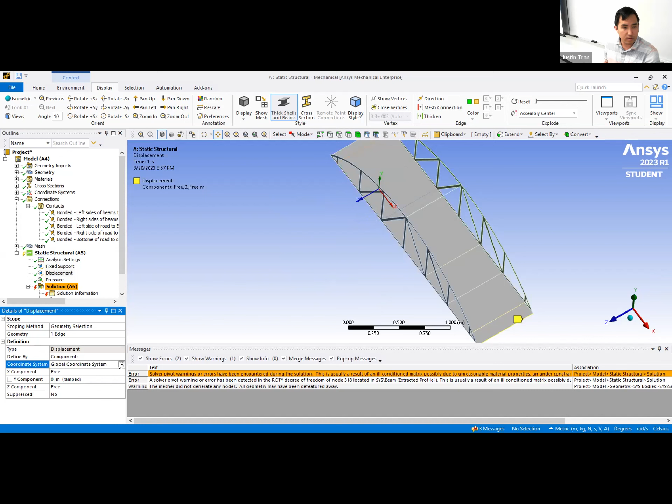Everything looks to be in order. None of those have actually done anything. The solution is, as you can see... yeah.

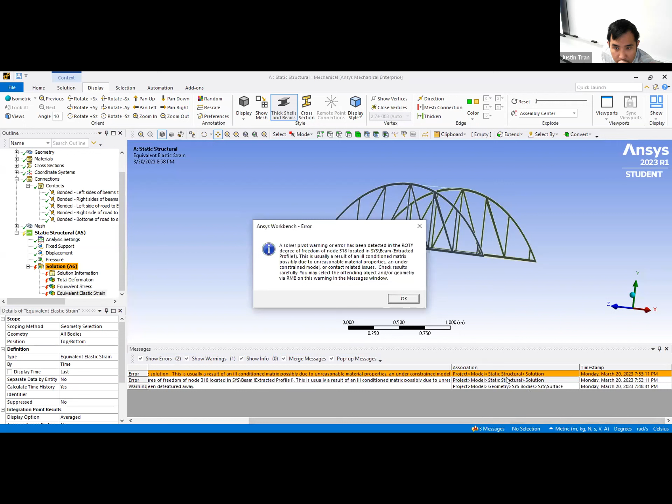Let me try this really quick. If that's what fixes it, I'm gonna scream. I'm gonna try a fixed support on the other side too. Let's see. Okay.

I shouldn't have deleted that one. I should have just left it there. Yeah, it's fine. Because that constraint acted as a fixed support, sorta. Right, it's supposed to anyway.

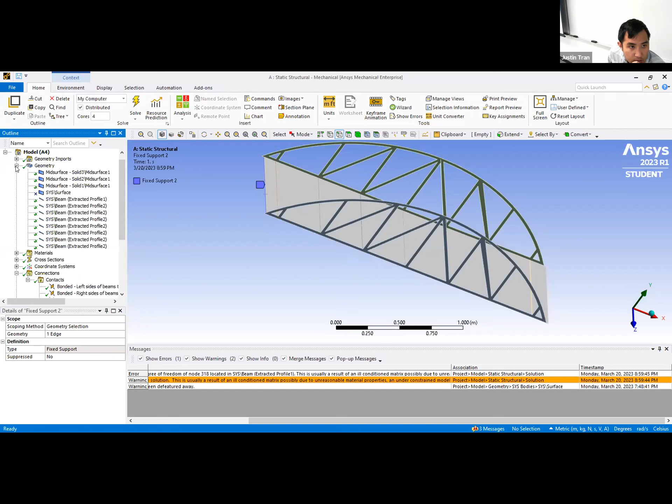Just beam extracted profiles. Top, yeah, so it's the top beam that's... Okay, let me give it one more try because it's 7 o'clock here. I'm not sure, let's try it. Let me try suppressing it really quick.

Should that beam have that problem? It shouldn't be. What were we saying, Una? The first search on the ANSYS forum says there's a gap somewhere in the model. Okay, it could. So it could be that. Do something else. Yeah, looks like that beam right there is the problematic part.

And so I would probably go back to SpaceClaim and see if there's a gap there or if that's properly connected at that point. But it looked like that's properly connected. I mean, the connection here is good, but I would go back and check in SpaceClaim that it's actually...

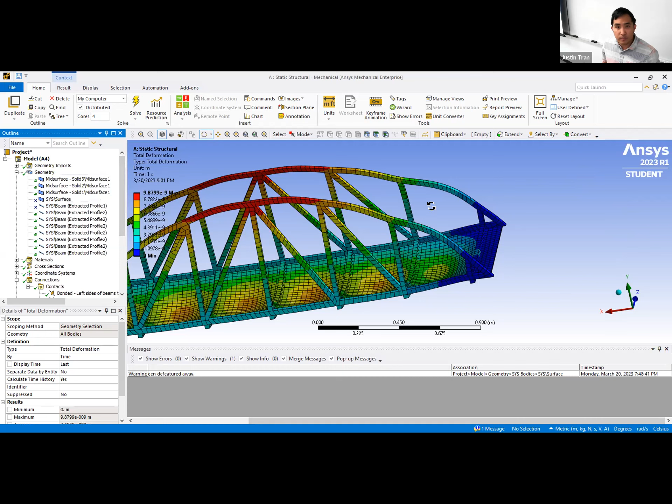For some reason that one seems to be giving the issue. So yeah, but everything else looks okay from here. Yeah, okay, okay, all right. I need to, it's past 7, so I need to start the lecture. Okay, okay, okay.

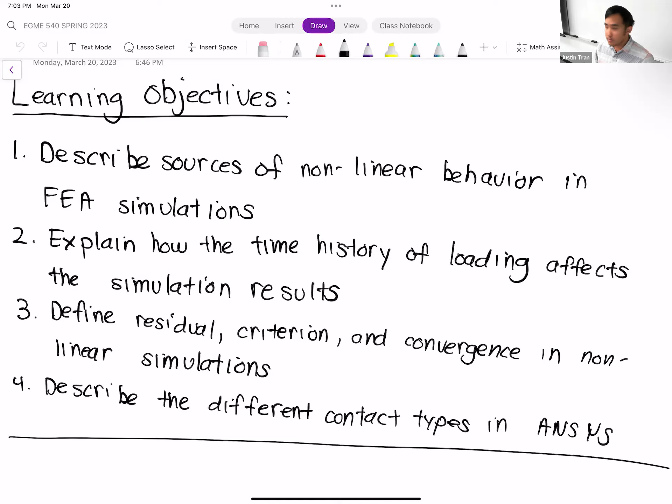Okay, so let's talk about non-linearities in FEA. And so up to this point, and this includes activity 5 that we didn't do this week, up until this point we've basically been making the assumption that our simulations are linear. And you can think about linearity in a few different ways. On the one hand, the first thing that probably jumps out in your mind is we are using a linearly elastic material model. But linearity actually extends beyond that.

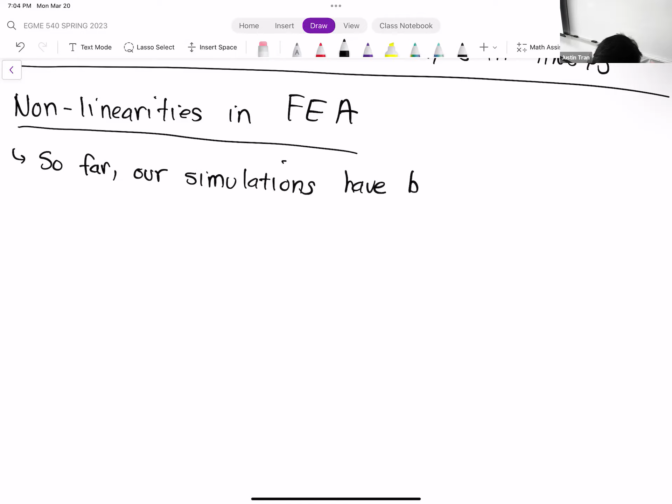We'll talk about what that means and what it means to actually lift linearity. And so like I mentioned, linearity has to do with a lot more than just the material model. It kind of has more, just in general, to do with this idea of proportionality.

When you can assume linearity, you really only have to run just one simulation. Ideally, part of the power of FEA is that you can run simulations under a multitude of different conditions, but when you have linearity, you really only need one. And as long as you're not changing the directions of the loads, not adding or subtracting loads, from that one simulation you can learn a wealth of information due to this proportionality.

Let me give a quick example to show what I mean. Let's say we have a cantilever beam, and when we expose it to a certain load, say 1,000 kilonewtons, the beam is going to deform, or displace, by 3 centimeters.

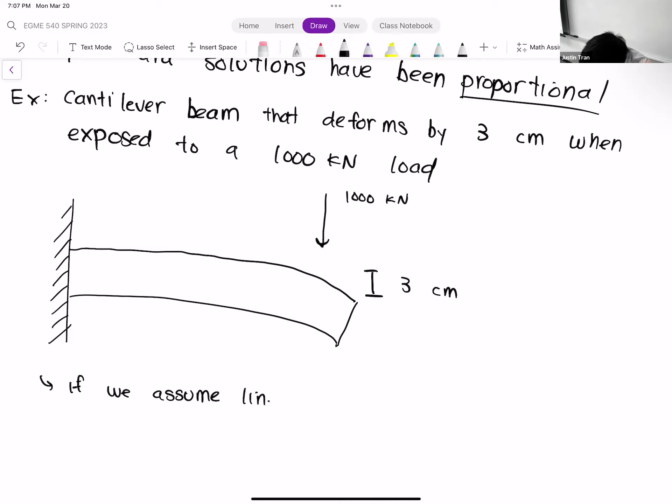So if we assume this situation is linear, if we assume linearity, I can tell you the result of the simulation if we cut the load in half.

So let's say instead of 1,000 kilonewtons, we apply a load of 500 kilonewtons. Because of this proportionality assumption, if we cut the load in half, that means our displacement, or our response, is also going to be cut in half. You don't even have to run the simulation — you can already tell right away.

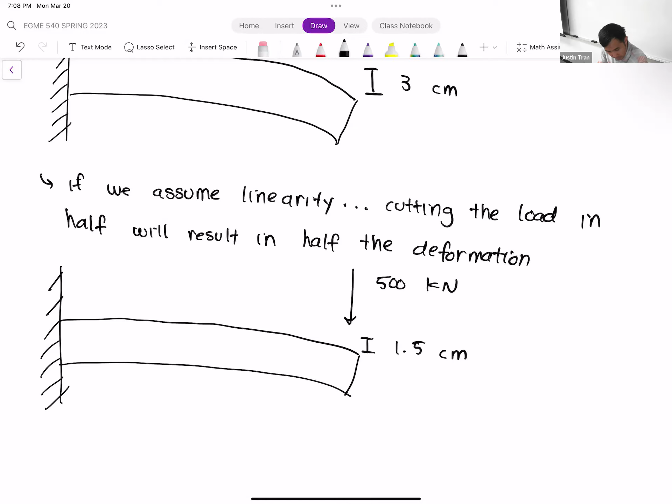So if we apply a load of 500 kilonewtons, this displacement here is only going to be 1.5 centimeters, just half of what it was before. This relationship largely has to do with the fact that we assume our material model is linearly elastic, but there are a lot of other things that are assumed linear in finite elements as well. So that's what I mean by linearity.

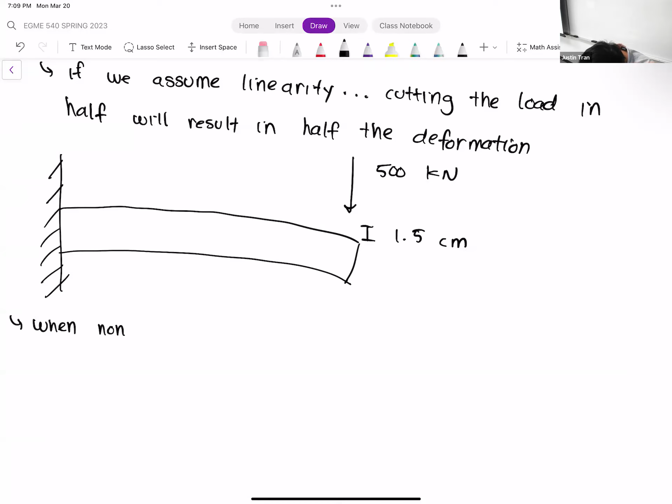Of course, what we're talking about this week is non-linearity. When we assume non-linear behavior, or when non-linearities are present, we don't have this directly proportional relationship. In reality, non-linearities are always there — the fact that our simulations are linear is very much an assumption. So when we say we're introducing non-linearities, what we're actually saying is that we're making our simulations more realistic.

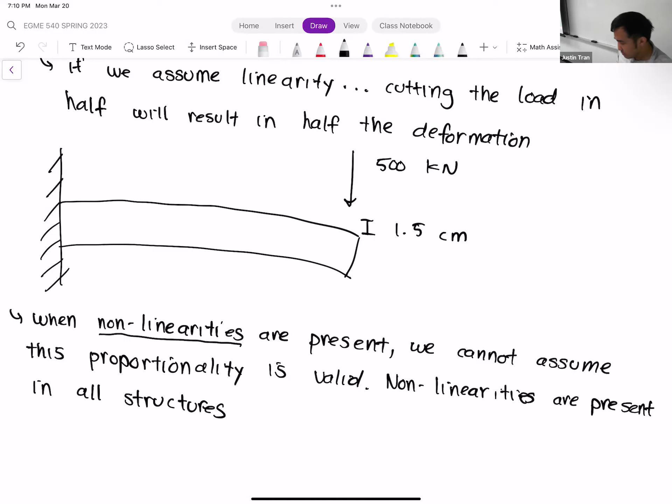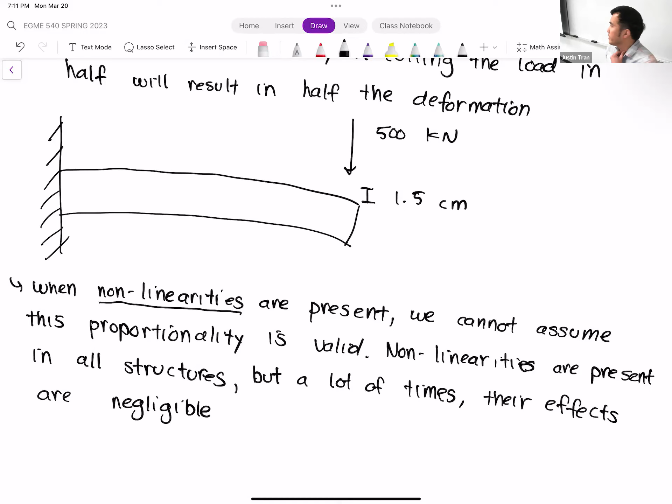But in a lot of cases, basically all the cases we've seen so far, these nonlinearities' effects have been fairly negligible. So we'll talk about some situations where you can ignore the non-linear effects. But in situations where they can't be ignored, we need to make sure our simulations can pick up on these as well. ANSYS has a lot of tools for picking up on these large sources of nonlinearity, and we're going to talk about three main sources of nonlinearity and how ANSYS deals with them.

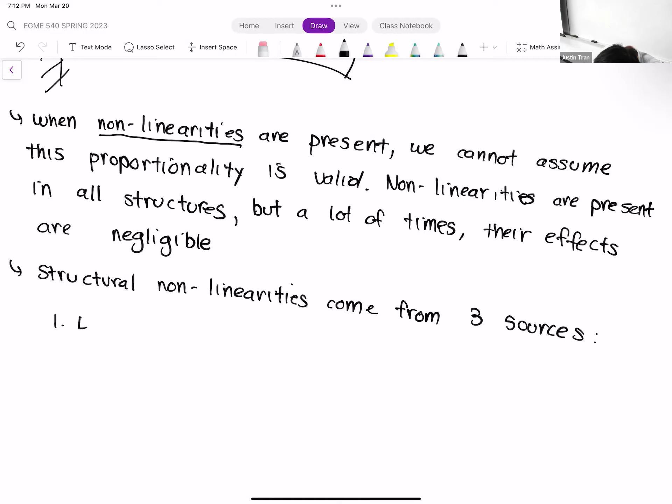There are more than these three sources, but these are the three main ones. The first one, and probably the most common, is large deformations — meaning anytime the deformations are so large that the structure distorts significantly from its original configuration. This causes some issues that we'll talk about soon.

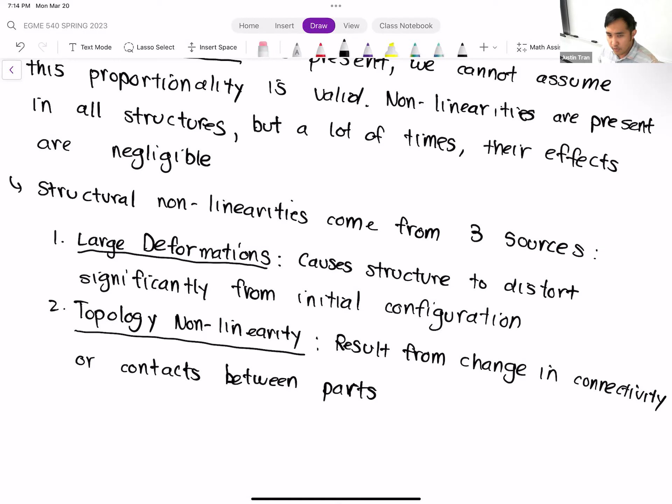The second source of nonlinearity has to do with topology — we call these topological nonlinearities. These result from a change in connectivity, and are directly a result of contact. The most common case is when you set the contacts to certain settings. For our last two activities we've seen the effects of contact, but so far we haven't explored that all too much — we've pretty much set all of our settings to be bonded. This week we'll talk about the different settings for the different contacts and see what effect that has on the results.

And number three, we have material nonlinearity. This goes back to our material model. If you remember from a few weeks ago when we talked about material properties, we talked about how there are different models out there, like hyperelasticity. When you introduce those, that introduces nonlinearity in the material properties.

Okay, so we're going to go through all three of these different causes, kind of what you can do about them and what features ANSYS has to simulate them. But before we jump into that, I want to preface this by saying, when you introduce nonlinearities into a problem, not just FEA, when you're talking about any kind of engineering or applied math problem in general, nonlinear things are always much more difficult to solve than linear.

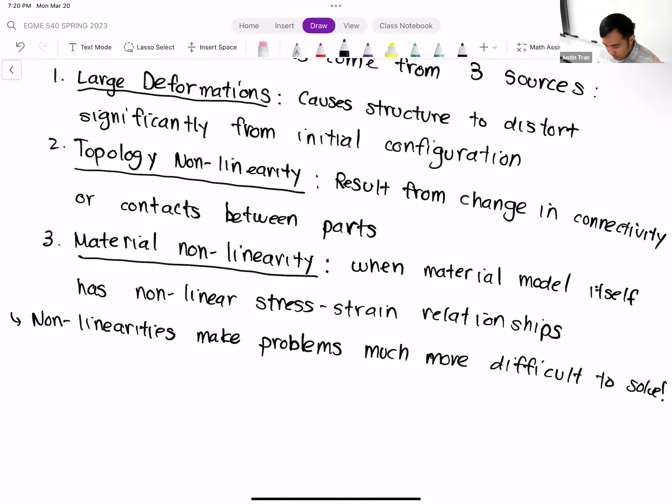Okay, all right, so let's expand on each of these three sources and talk about why they introduce nonlinearities. Let's start with large deformations. When you have large deformations, just like I mentioned above, your mesh and your geometry is going to be significantly distorted compared to where it started.

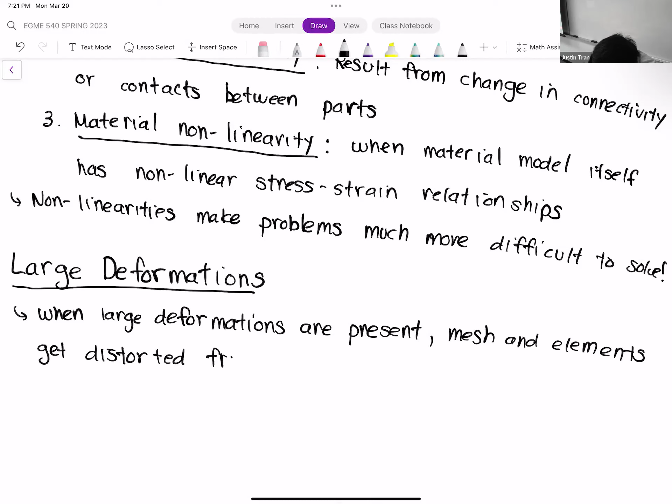It's actually something that's quite unique, and it's not something that I really appreciated until I actually started working here, because my background is mostly in fluid-based FEA. The thing about fluids FEA is that your mesh is always fixed, so you don't really move the mesh. For solids FEA, or structures FEA, the mesh actually changes and distorts along with the deformations that you solve.

Dr. Tran, I have a question. When you say fluids FEA, is that something completely different than computational fluid dynamics, or is that what you're implying? It's CFD, I consider it CFD, but there's different ways that you can run CFD. I think the most common way is to use finite volumes, but you can also do a finite element based CFD. Oh, I see, that was kind of my research. Sounds good.

When your mesh and elements get distorted—something we spent a lot of time talking about—that's usually what you want to avoid. When these element distortions get so bad, your solution can start to get bad too, because your elements become very skewed compared to before.

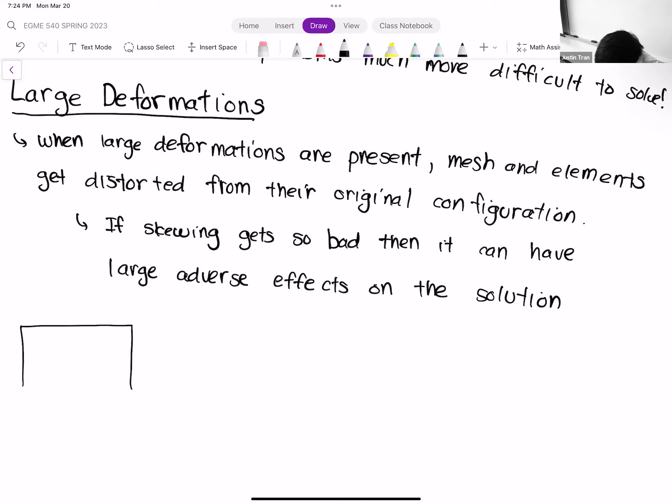You could have a situation where you work really hard to get a mesh with elements that look very nice. I'll do a 2D case since I'm drawing on a two-dimensional iPad. Maybe you work really hard and get elements that look like this—straight parallel edges, 90-degree angles, very high quality element.

But let's say you apply a load onto this element, or onto the structure overall, such that the element starts to distort. Maybe you apply a load and it starts to look like this, and if you apply enough, the element distorts even further and ends up looking like this.

That's obviously very bad. After you apply your load, if you want to compute something like stress on this element, you're going to have a hard time—you'll get a lot of those adverse effects of a poor mesh that we talked about last week.

In some extreme cases, when the distortion is really bad, you may have to do what's called dynamic remeshing.

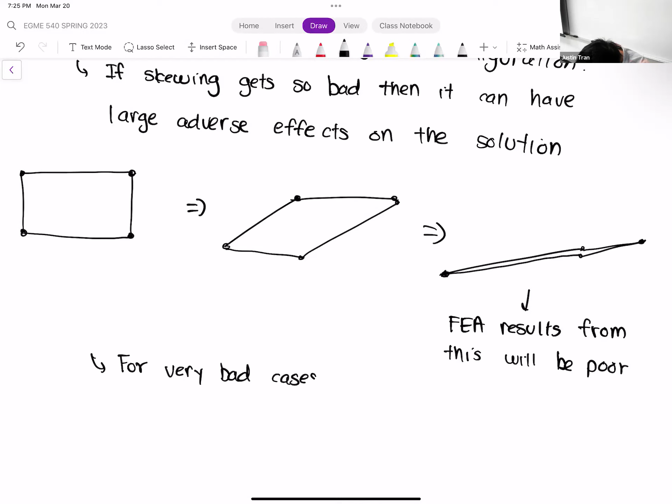Sometimes you'll have situations where you apply a load and your structure deforms so much that it might as well be a whole new geometry. In those situations, you may have to just make a new mesh when your deformations get that bad.

You typically want to avoid this because remeshing is a very expensive process, especially for the heavy duty meshes that are in the millions or tens of millions of elements.

But that is an option, and there are some problems out there where remeshing is your only recourse, so that's the only thing you have to do. The nice thing in ANSYS is that it's built in fairly well, so you can remesh—it's just not a good thing to do.

I had a student who just finished last semester. He was working on a problem for me where he was experimenting with the remesher a bit, but even for a very simple problem, the cost got so extreme that it just was not feasible. So yes, it's possible, but a lot of times you need a supercomputer for that.

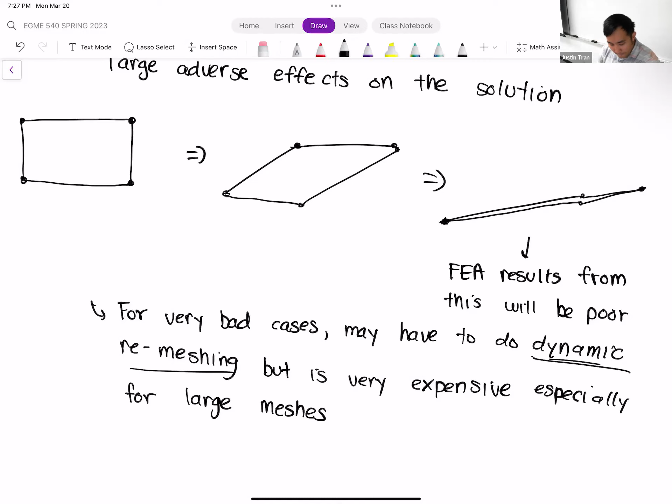One way you can deal with this, at least for static problems—which is the majority of what we're doing in this class—one way you can deal with this kind of geometric nonlinearity is to apply the load in steps.

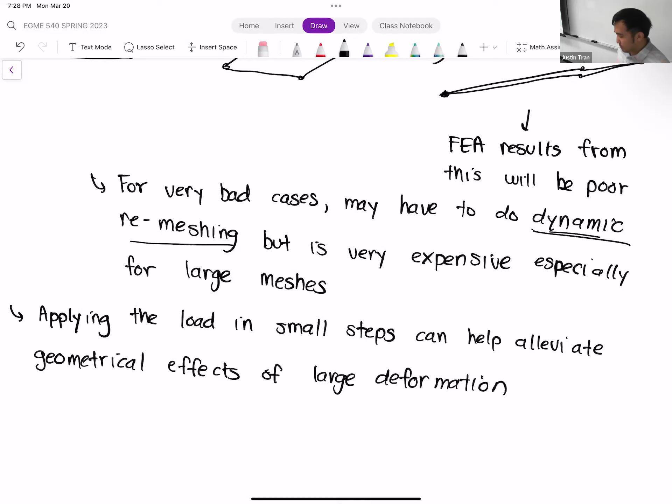The good news is that ANSYS actually does this automatically already. I'm not sure if some of you have noticed, but if you click on one of the loads you're applying in your ANSYS activities, in the bottom right of the screen you should see a ramp that kind of goes up. That's ANSYS's way of slowly ramping up the load until you reach the final configuration.

Oftentimes you're going to see something like this, where on the horizontal axis we have time, and on the vertical axis we have load. You'll see ANSYS do something like this, where it kind of ramps up.

ANSYS does this automatically for a few different reasons—it's not just for large deformations. It helps a lot with stability, making sure your simulation finishes in the most stable way possible, but it also helps with this kind of large deformation as well.

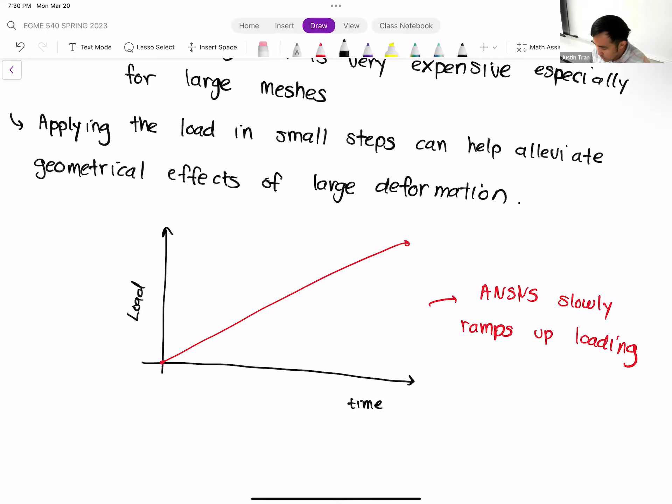Because when you start to have nonlinearities, what you start to see is that this relationship between load and response—or load and deformation, or load and stress—does not really follow this linear model.

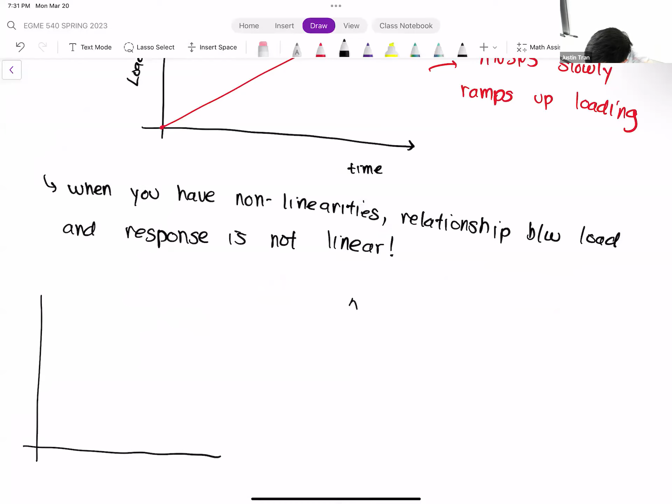So for a linear case, you might have something like this. On the left here, I'm going to have time and load, and right here, I'm going to have time and deformation. For the load, we're going to ramp that up linearly, so it's going to look like this.

What ANSYS is going to do is actually apply the load in small increasing increments. We start with a load of 0, and ANSYS knows this is your final load, the one you're actually applying inside ANSYS. What ANSYS does is then ramp up slowly to that: maybe 10% of the load, then 25%, 50%, 75%, 90%, and 100%.

Each one is actually a successive simulation. So each time the load is increased, ANSYS is running a simulation in the background to compute what the deformation would be.

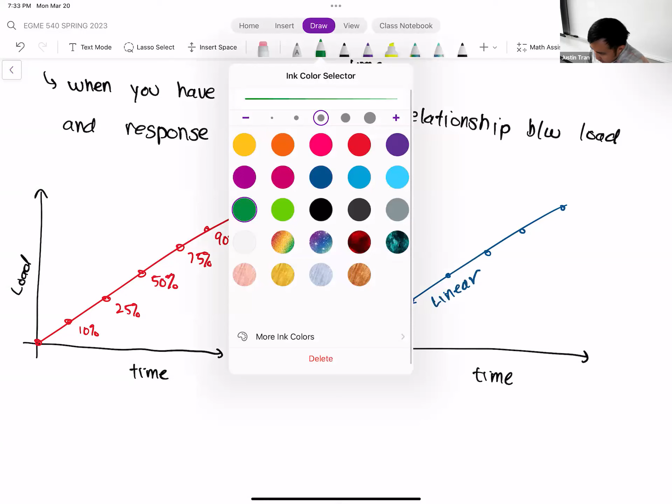If you had a purely linear simulation, you would have a graph that looks like this. As you ramp up the load, the deformation or response is also going to ramp up linearly. But for a nonlinear simulation, you're going to see a behavior more like this. For the smaller values of load, it mimics the linear case, but as you get to higher values of load, you actually see it deviate from that curve.

Typically what you'll see is that when you introduce nonlinearities into the problem, the computed deformations that you get actually increase.

So Dr. Tran, is it safe to say that in a linear FEA analysis, the loads are linearly related to the deformation? The relationship is linear, is that what you're trying to apply here? Yep, exactly.

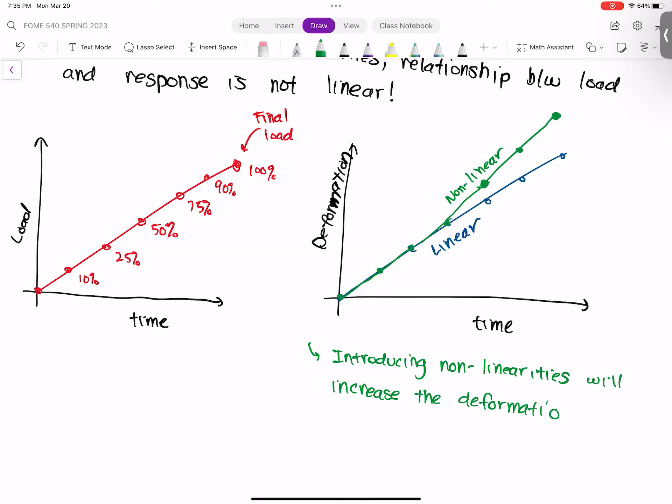What about the stresses? Are the stresses linear to the load? Yes, typically they are, because of that proportionality thing we talked about at the beginning of class today. I'm using deformation as an example here because that's usually the most apparent one you can observe, but this relationship also works for stresses.

Another thing I'm comprehending from those graphs is that for nonlinear analysis, the deformation increases with time, but in a nonlinear way, is that right? I'm using time here because we're applying the load gradually over time.

With each time step, each dot that we have here, we're increasing the amount of load. It's not necessary that nonlinearity makes deformation change with time; it's more the relationship between the load and the deformation. I'm using time as an axis here just to show how the load ramps up and how that changes the response.

I see. Thank you, sir. Yep.

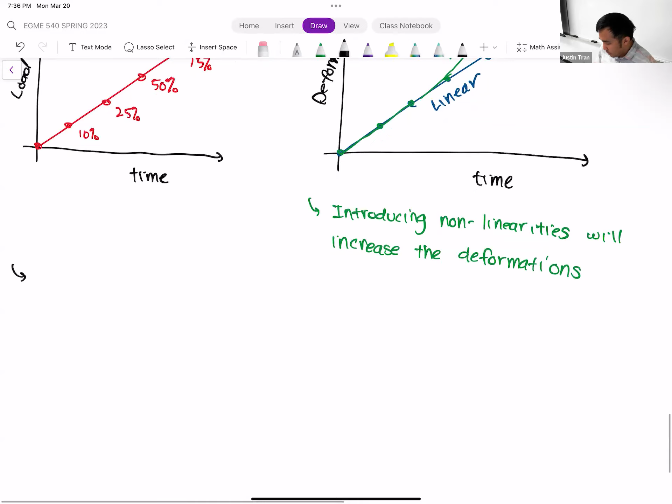The reason for this is interesting. If you recall from our discussion of advanced meshing, as your elements tend to get more and more distorted, it tends to stiffen up your system.

Of course, this effect is most pronounced when you have a linear element. So when you have linear tetrahedra or linear hexahedra, you see that very pronounced — that's the shear locking effect we talked about before. But even for quadratic elements, it has this effect too, just not as pronounced.

So when you tell ANSYS that you want to run a nonlinear simulation, ANSYS becomes a lot more careful about how it ramps up the load to try to maintain as much mesh quality as it can.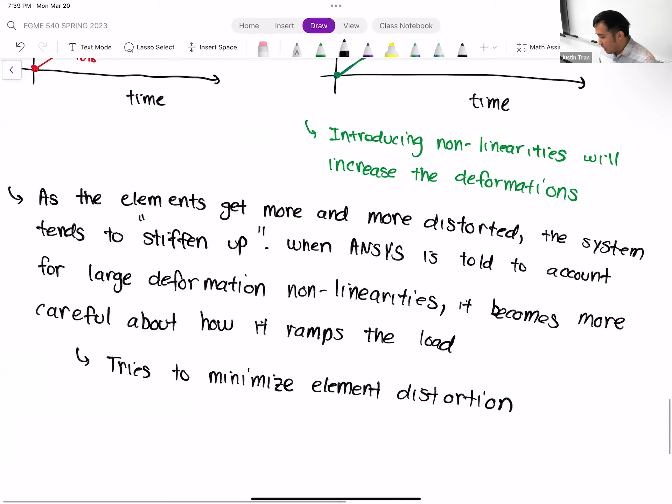I will say that, for a lot of our activities, unless you really kill it with a very large amount of load, you're probably not going to see a big difference between the results without large deformations and the results with large deformations. But that's basically what's happening under the hood. So when you turn on large deformations, ANSYS is really being very careful about how much the elements are distorting when you apply the load.

And you can modify this manually too. So if you want to modify how many steps or increments you want to ramp up the load, you can do that as well.

All right, any questions on this?

Okay, all right, let's take a quick detour before we move on to topology nonlinearity, and let's talk about nonlinear convergence.

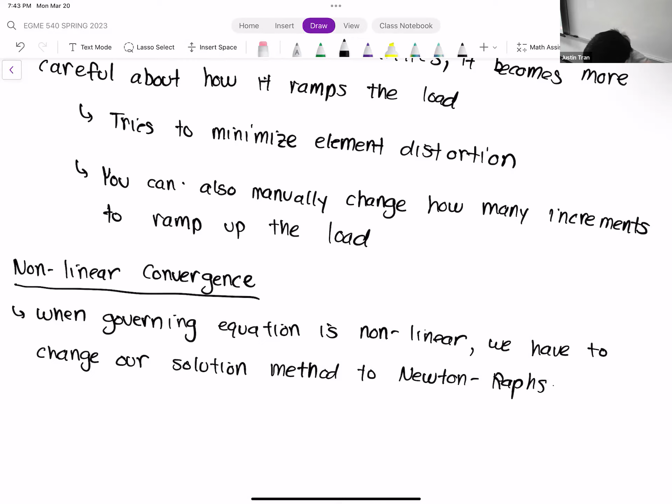Newton-Raphson is a very common method. It's used a lot in code because it works so well for nonlinear problems. We're not going to get into the details of that method—that's a totally different class—but I'll tell you what it aims to do. Basically, the way Newton-Raphson works, it works specifically for nonlinear equations. It linearizes them, approximating the nonlinear terms with linear terms.

Dr. Tran, I have a question. Please let me know when it's good to speak. Yeah, you're good.

One thing that popped up into my head when you wrote that Newton-Raphson vocabulary in your notes is explicit solutions and implicit solutions. Excuse the car alarm in the background. However, back to my point—is an explicit solution a linear solution and an implicit solution a nonlinear solution, or are those related somehow, or am I thinking about something completely different regarding explicit and implicit?

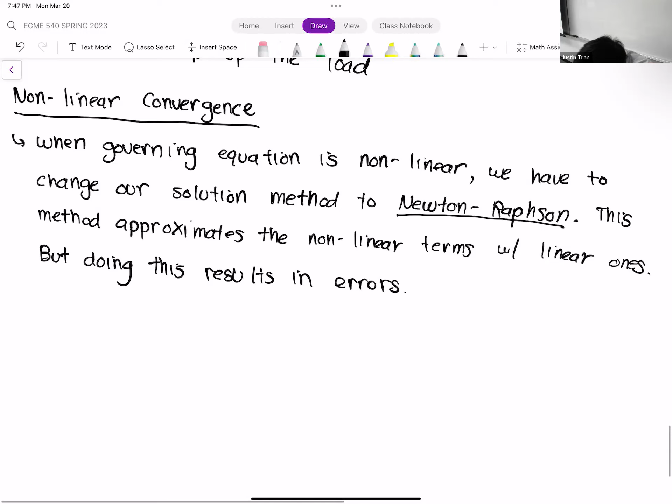And so the way that we compute these errors is that once you've approximated those nonlinear terms with linear ones, it becomes a lot easier to solve that equation. But if you then take your solution to that equation and plug it back into the nonlinear form of that equation, you're going to get some discrepancies—I should say, plugging it in.

These errors, we can quantify. Usually these errors are averaged across your entire mesh, and we give these errors a specific name called the residual.

Sometimes you'll hear the term residual show up when talking about computational methods in general. Usually the residual has to do with the Newton-Raphson method. You have a linearized solution to a nonlinear problem, and you want to see what the discrepancies are. Discrepancies are the residual.

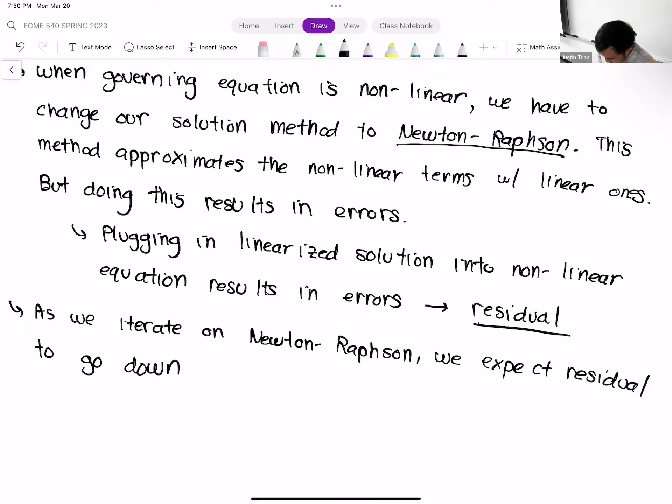So when we talk about nonlinear convergence, we're talking about the idea that we expect the residual to go down. Ideally, the residual should go down below a certain threshold so we can say our solution is accurate enough.

You can actually plot this. If you have nonlinearities turned on in your problem, whether from large deformations, topology, or material properties, you can view the nonlinear residual.

If you go to solution information in ANSYS, and then you go to, you can do one of two things: force convergence or displacement convergence.

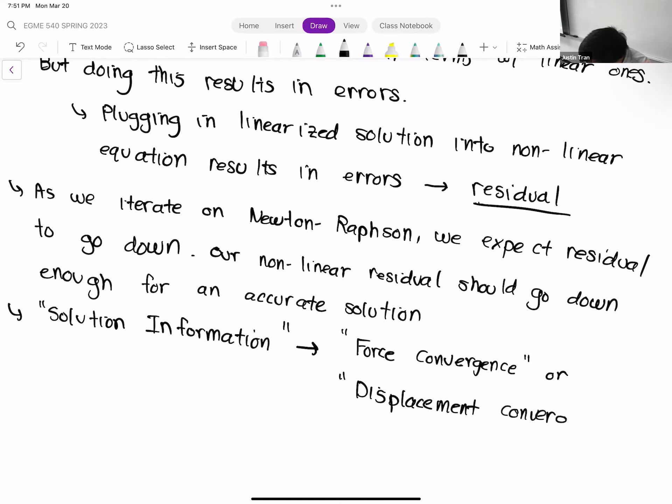Each data point is a different Newton-Raphson iteration. That's one good way to check, because one thing that can happen is that when you introduce nonlinearities, maybe you're introducing a little too many, and your solution may not be converged. So it's a good habit to check when introducing nonlinearities that you're still getting good nonlinear convergence.

So again, this is different than mesh convergence—mesh convergence is a different thing. But you want to make sure that whatever finite element solution you have is converged on all fronts. Every type of convergence, you want to make sure you're converged. That's kind of the idea for FEA. Any questions on this?

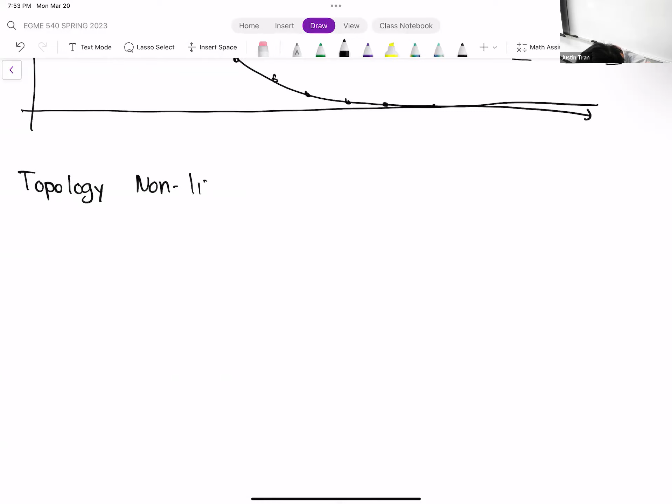Our question is, how would we check that it's converged again? Yeah, you would just follow this same process: go to solution information from ANSYS mechanical, and then check either the force convergence or the displacement convergence. You should see a plot that looks like this, something that goes down with time.

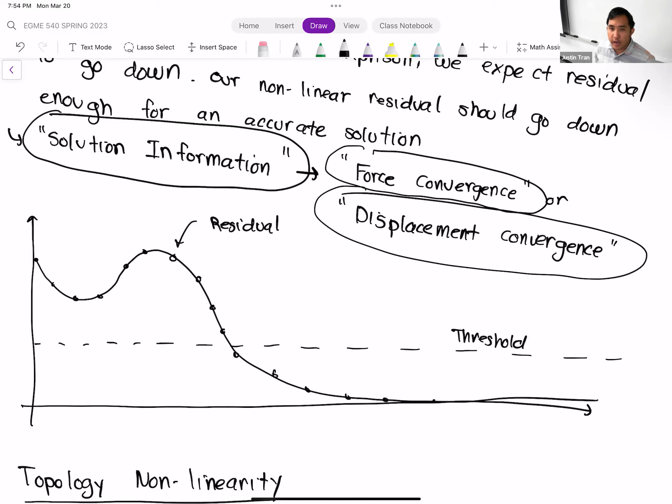Okay, so topology nonlinearity—this more has to do with the contacts between different parts in an assembly.

So far, we haven't really dealt with this, because whenever we have contacts between different parts, we usually assume that the parts are bonded together. When they're bonded, when you set a bonded support, you're basically assuming that even though you have different parts in an assembly, they're going to behave as one because they are bonded together. But if you loosen up this assumption and allow parts to slide or even separate, then you can introduce some nonlinearities into the simulation.

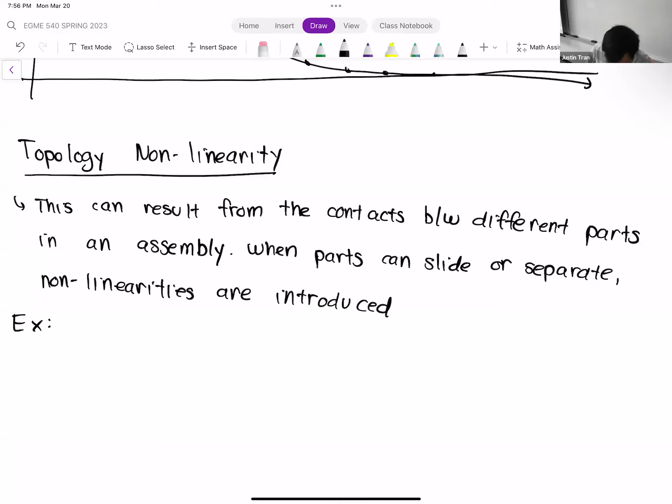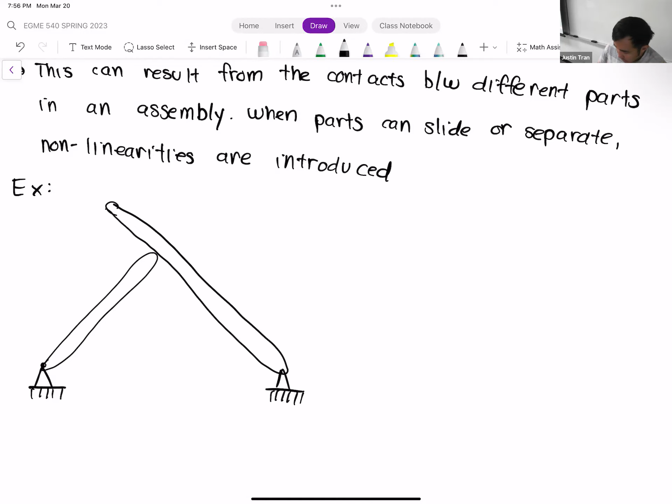All right, so I'll do a quick example. Let's say we have a two beam system. Maybe one beam is like this, and it's propping up another beam. And right in between these two, we have a contact.

So for the case when the contact is bonded, let's say these two parts are bonded together. When we apply a load here vertically up top, and that contact is bonded, then this whole structure kind of behaves as one.

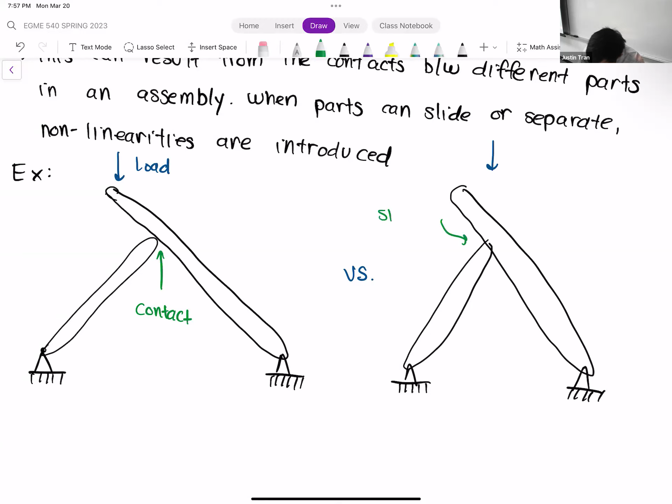Versus, let's say that we allow these parts to separate and to slide. So just like before, we're going to apply a load up here. What can happen is that if this contact slid, you can imagine: you're applying load up top, then this beam is going to rotate down this way if it's sliding and it loses that contact. If this beam slides down like this, it loses contact, and so the geometrical support or the structural stiffness of this entire assembly as a whole is going to change if that slides.

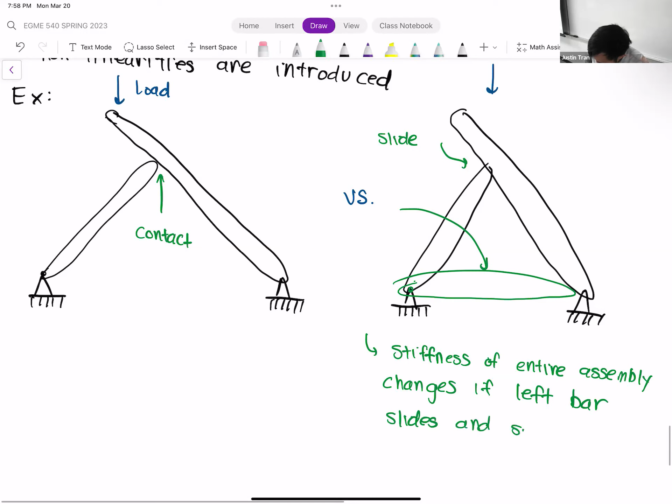And so maybe this only happens for certain values of the load. For a light amount of load, maybe the separation doesn't occur and this can still behave as one kind of part. But as you increase the load, maybe that increases the amount of tangential force that the left bar experiences, and then eventually it separates. So you get this nonlinear relationship of load versus deformation - at one point you might have an abrupt, big change in the amount of deformation that you see.

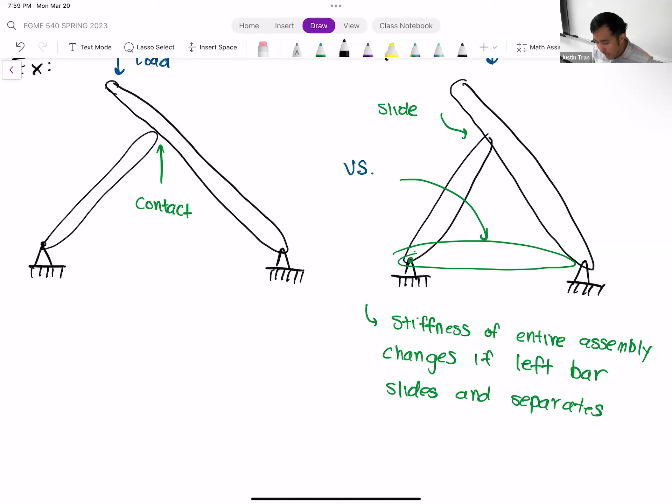Okay, and so with that said, let's talk about all the different contact options that you have within ANSYS and talk about whether they introduce nonlinearities or not. There are 5 that I want to go over. So the first one I want to go over is bonded.

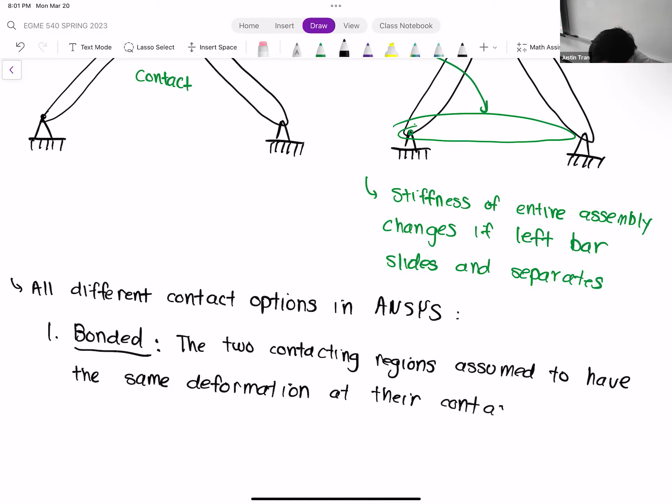This is the one that we have been using in activity 3 and activity 4. When you have a bonded support, that means the two parts, or the two contacting regions of the two parts, are completely bonded together. So their deformations are the same, or they're matched together at their contacts. They're coupled together in both the tangential and the normal directions - no sliding, no separation.

And so of course, with the bonded contact, the bonded support, this does not introduce any kind of nonlinearities. No nonlinearities.

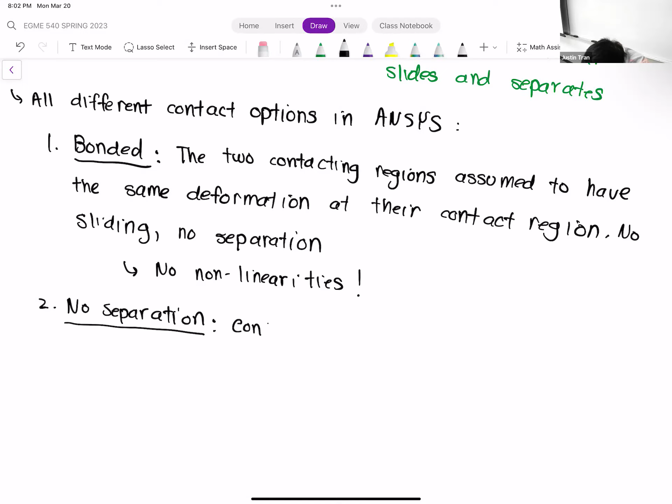All right, next we have no separation. Under no separation, the two contacting regions are coupled only in the normal direction, but they are allowed to slide past each other by a small amount. So it's not that much - there are still some constraints in how much they can slide, but they are able to slide.

Or at least that's the assumption - that the sliding is very minimal relative to the overall deformation of the entire structure. So effectively speaking, on a grander, more overall scale, there's no big amount of sliding. And because there's no big sliding and no separation, this also does not allow any nonlinearities.

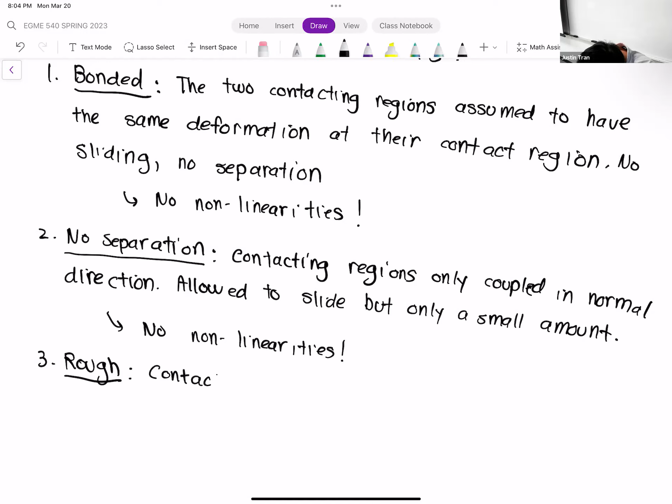All right, number 3 is rough. A rough surface is when the two surfaces, or the two contacting regions, are allowed to separate. But a rough surface means they can't actually slide - absolutely no sliding is allowed.

This is meant to represent the case when you have two things that both have very rough surfaces, and the coefficient of friction is so high that they physically can't slide past each other, at least not with a significant amount of force. But they are allowed to separate - you can almost imagine two saw-tooth surfaces that are going to interlock with each other.

And this is the first case where this does introduce some nonlinearities, because when surfaces are allowed to separate, and if separation does occur, that dramatically changes the overall stiffness or how the overall structure can handle any kind of response.

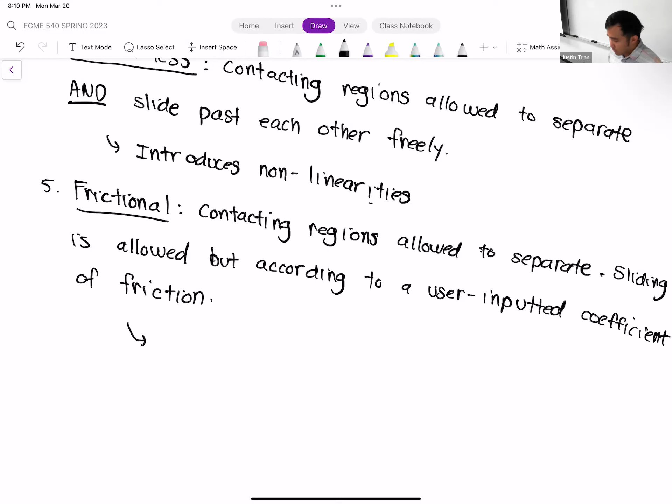And this, of course, introduces non-linearities.

So those are the 5 types of contacts that you can run in ANSYS, and that's the difference between them. For most of this class, with one exception being activity 5, we're going to mostly be using bonded supports just because that's the easiest to work with. But I did want to make you aware of the other ones, especially if you want to use different contacts for your final project, which we'll talk about after this.

Okay, any questions on topology nonlinearities here?

Okay, so one last thing I wanted to cover today before we close it out is how ANSYS deals with when two regions penetrate each other.

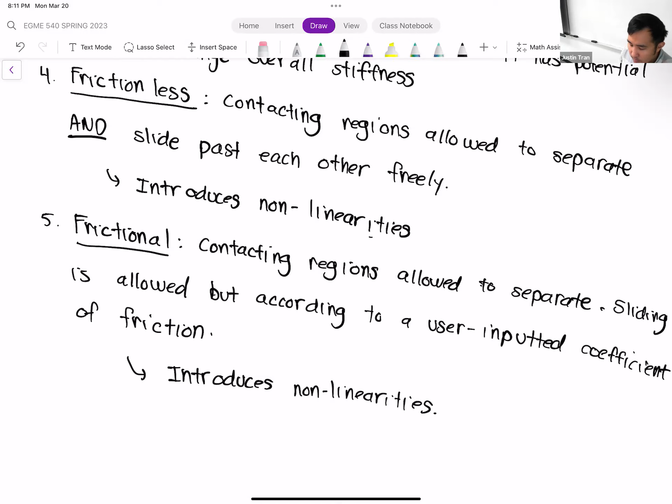No matter what type of contact you choose between different parts, ANSYS makes it impossible for one part to push into the other one, which is physically impossible, right? If you have two parts, like my glasses and my pen here, unless we live in the virtual world, there's no way for my pen to phase through my glasses.

So the way this is enforced is that ANSYS basically does a check. When you have a contact between two different regions, it's checking to make sure that the nodes of one part are only contacting the nodes of the other part on the surface. There should never be a case where the nodes of one part are inside the body of another part. Let's say we have a triangular part here and a square block here.

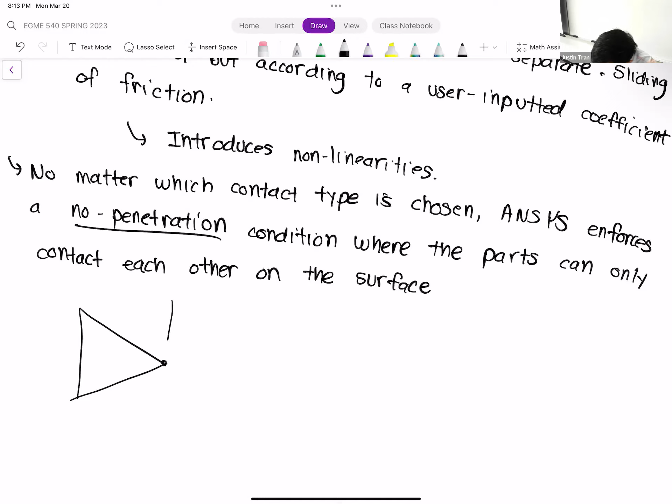ANSYS is always going to make sure that even if you have a load that's pushing it this way, that triangle never actually pushes into that square. Which may seem like a very obvious thing, but when you're running very complex simulations with lots of parts, this actually becomes not so trivial, because you're individually solving for the deformations for each part, and unless you directly account for this for the other parts, you may have one part phase into another.

So what you don't want to happen is something like this: you have a triangle, and it pushes into your block just like that.

It sounds trivial - the first time someone told me you can't have two parts penetrate each other, I thought, yeah, duh, that's obvious. But once you start getting into the mathematics and the methods you actually need to make this happen, it's actually really complicated. Contact is really hard. I know about it on a surface level, but the actual mathematics is quite difficult - the algorithms are quite difficult. But ANSYS makes it really easy, so you don't have to worry about it when you're using ANSYS.

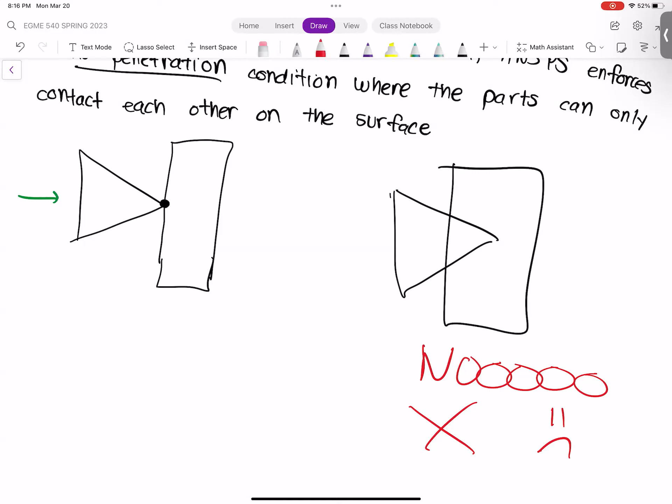Professor, I'm still having problems with ANSYS. Okay, hang on. Also, is this coming week spring break? Yes, next week is spring break, so we don't have any class next week. That means the project is due on Monday, a week from today.

Chris, I have one question from this student and then I'll come back to you. This is problem 7 — you told us to do it without shelling it, right? So I just meshed it directly and got the meshes, but on the next step I got an error. Is that fine? Yeah, that's fine, problem 7 is the solid, it wasn't working, right? Yeah, that error kept coming. That's what I expected, this geometry is very challenging on purpose, so if you actually do get a result from the solid elements, that's more amazing than if you don't. If it doesn't work and gives you an error, just report that. Okay, cool, thank you.

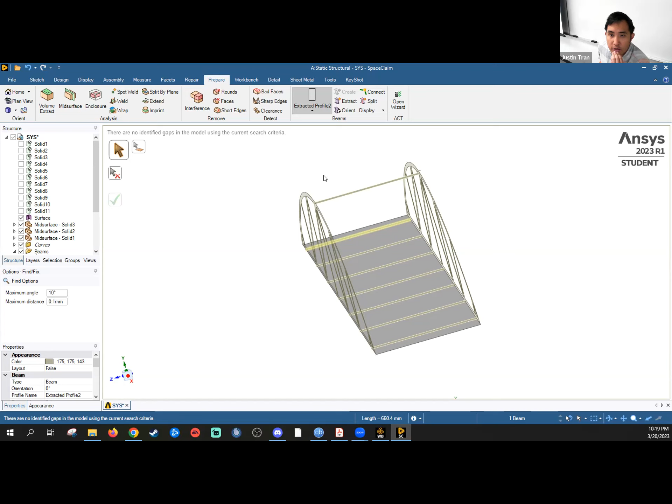I even went through repair, checked stitch and gap and all those tools. I checked everything I could think of. This beam right here is the one that's causing it, but I don't know why or how. Your guess is as good as mine at this point. Let me see... I wonder if we move it — let's try moving it and see. Let's try moving it up to here.

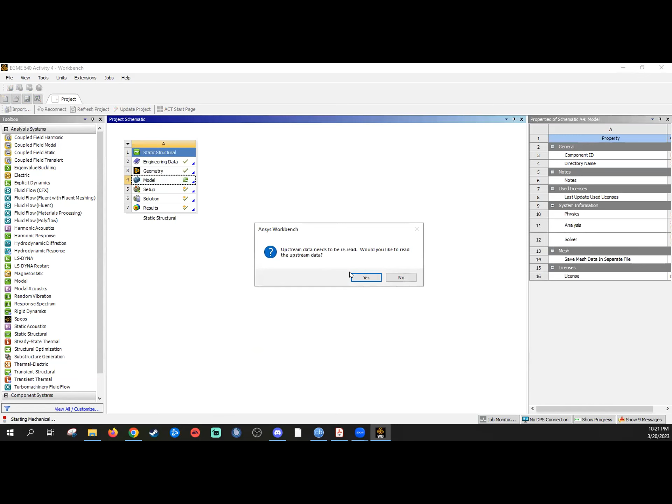So when you do that... Okay, let's switch back to Mechanical. Let's see. Okay, what I'm going to try is separate the contacts. To help debug the issue, I'm going to change your contacts so the bottom beam has its own contact region, and the top beam has its own as well. Let's see what that does.

Oh yeah, it was still doing a bunch of weird stuff. Okay, it's still loading. It should be loaded now. Okay, I'm going to stop.